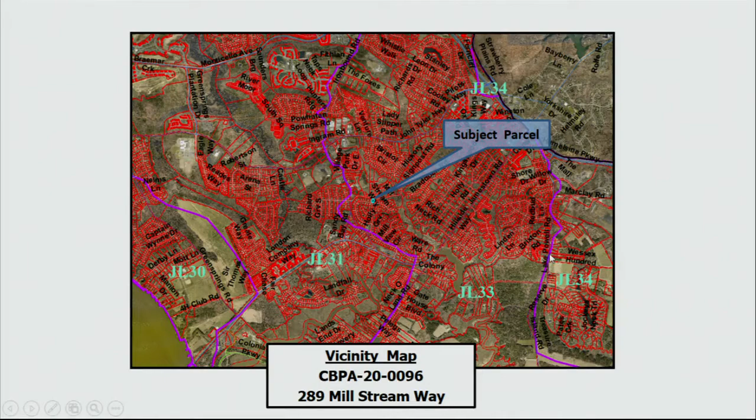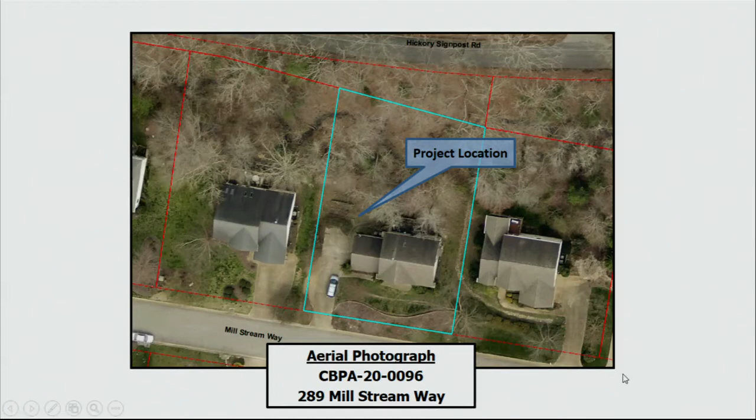Vicinity map above showing the parcel here in blue, again, within the Mill Creek watershed. Aerial photograph of the parcel in question and the approximate location of the project. The topography showing a slope down towards the resource in the rear of the property.

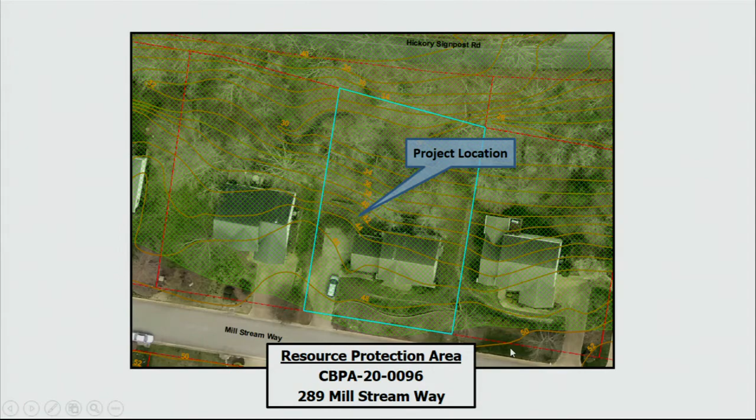This is the most current version of the site plan that has been submitted. The proposed retaining wall, a serpentine wall, has been pulled forward, along with the other two walls surrounding this paver area, with infiltration in front of the new serpentine wall. The proposed landings and paver area are shown here.

The 100-foot resource protection area as it affects this property. The edge of the wetlands is shown here in green, and the approximate center of the stream here in blue. The yellow area would be impervious area, and the orange overlaid on top shows areas proposed to be constructed with pervious pavers. There's also a conservation easement in the rear of this property.

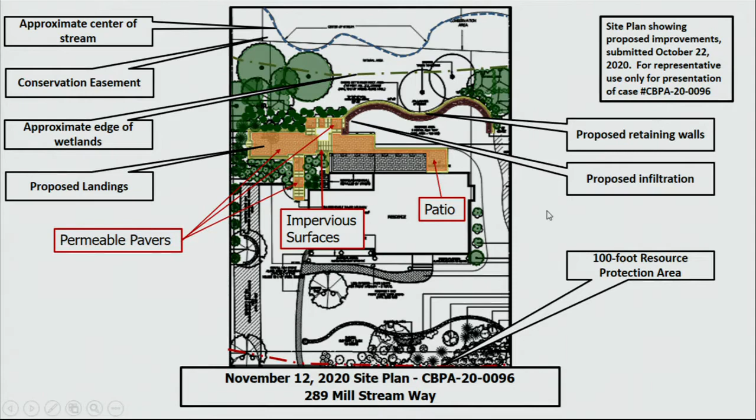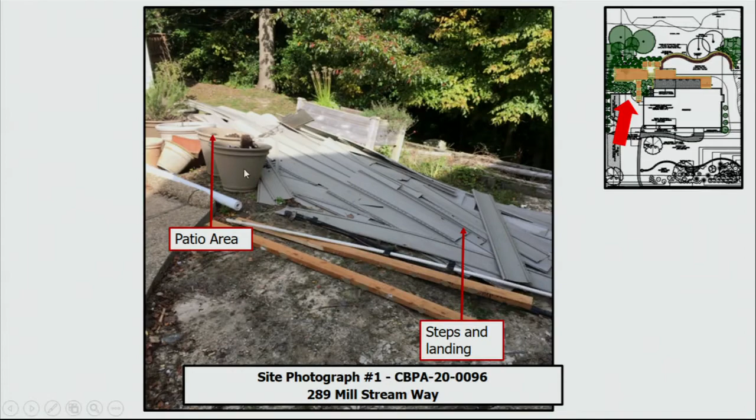Some site photos: the paver area would go adjacent and behind this driveway area, with the steps and landings to the right. This is the area of the approximate serpentine wall, patio, and landing area. This is the existing deck conversion. And again, the retaining wall would sit somewhere within this area, where the slope begins to slough off.

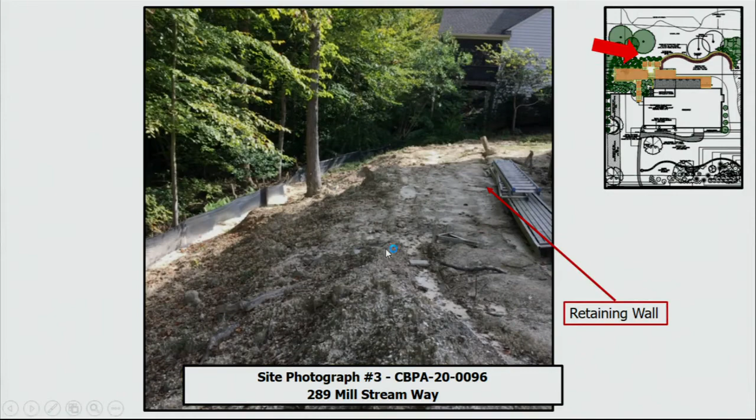Should the board wish to approve this project, all other necessary local, state, and federal permits shall be required. Enrollment in turf love shall also be required, and a mitigation plan of 3 canopy trees, 6 understory trees, and 11 shrubs shall be planted as submitted. A surety of $1,500 shall be paid prior to the commencement of work.

The serpentine retaining wall shall be no closer than 10 feet to the existing trees, with all fill recently placed between the wall and the stream to be removed and stabilized. This area should be re-stabilized with additional shrubs as ground cover.

The permeable paver walkways and landings shall be built to the DEQ standard of specification number 7, and shall encompass at least 400 square feet of the impervious surface. This exception request becomes null and void if construction is not begun by November 12th, 2021, with written requests for an extension submitted no later than October 1, 2021.

Thank you for your time, and I'd be happy to answer any questions the board may have. I'm going to start off with the first question.

You didn't have a slide showing where the proposed wall was that was presented to us last month, and where the new one is for this month. Can you pull up a slide so we can see that, and how much the wall was pulled back from what we looked at in our last meeting?

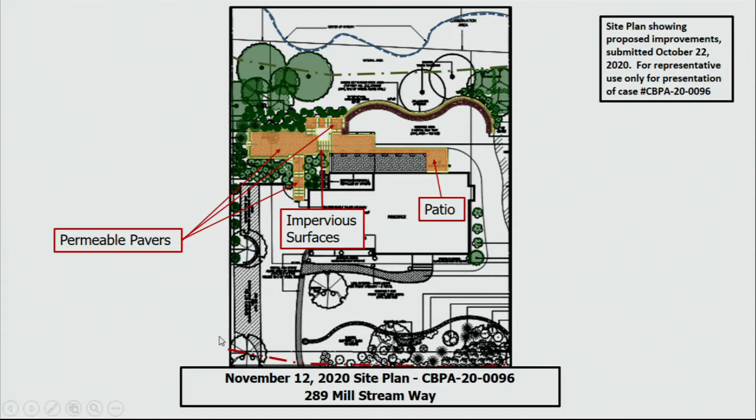Yes, so here would be the first submission of the site plan, with the serpentine wall shown here in yellow. It got pulled forward some here—by how much, I'm not entirely aware—but these would be the two site plans that were submitted.

Maybe when we get to the public hearing, I'd like to get that answered. Are we talking about 2 feet, 10 feet, or what?

Mr. Chair, that was one of the reasons we stipulated in the approval, should the board choose to approve, that the wall be no closer than 10 feet. We figured it's approximately 8 feet from the trees in the current configuration, so it must have been about 5 feet in the October meeting.

Wait, I didn't quite follow you there. So how many feet was it pulled back from what we looked at last month? Last month it was approximately 5 feet from the tree trunk. So it was 5 feet from the tree trunk, and we're pulling it back to 10 feet? So the wall's been pulled back 5 feet then? Yes, on average, approximately 5 feet back, around these two existing trees.

Mr. Gussman, I think it may vary slightly depending on what section of the wall you're referring to, so the condition in the recommendation for approval is that it be no closer than 10 feet, even though it may be a little bit closer than that in this design. It doesn't look like it was pulled back at all on the left-hand side of the retaining wall, but as you get to those trees on the right, that's where it got pulled back 5 feet.

So it's not 5 feet across the board. Okay. Are there questions from the other members of the board have questions for the staff?

I do, Mr. Chairman. Trevor, could you describe how the drainage flows through this property? Because I know there were some concerns over overland sheet flow and erosion, and that's one of the reasons the walls are there, to help stem that erosion.

Certainly. All water on this property basically flows backwards. It's fairly flat towards the house, and as soon as you get to the rear of the property, it starts to slope pretty significantly. Right now there's construction going on, so there's been disturbance due to the deck conversion. But as you can see in these photos...

Basically anything running this way comes over the driveway or around the house. For that reason, there's some erosion issues going on directly adjacent to the driveway, and coming directly from the other side of the house, which is why the serpentine wall, as is my understanding, has been proposed to take care of some of that erosion.

Thank you. They brought in dirt, though. That is correct. I believe that the majority of the dirt directly behind this addition was fill brought in, but the applicant can correct me if I'm wrong.

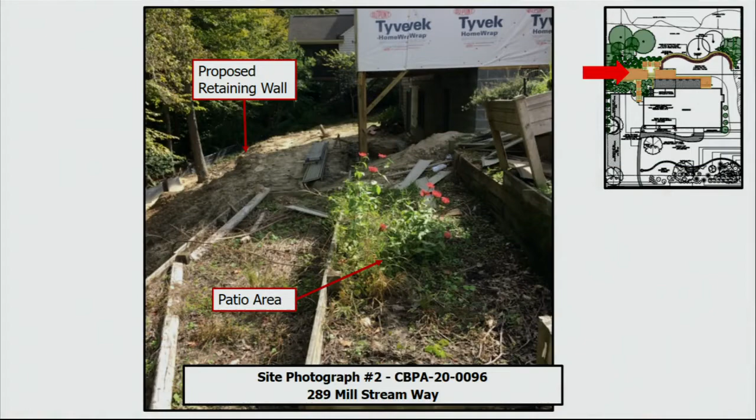How much dirt, since you're doing the work, I want to ask you this. How much fill are you going to have to move to get back to the 10-foot distance from the trees? Well, actually, dirt will actually be pulled out of there. It looks to me like there's a considerable amount of soil that's going to have to be taken back out to get the 10-foot distance back from the trees.

Where that soil has been leveled off from the excavation underneath the deck, that top portion will be rounded off just a little bit, and then from the 10 feet from the tree, we would go down approximately 2 blocks, plus about an 8-inch footer, so you're talking about 18 inches of excavation for the wall footer, if that's what you're asking.

What I'm asking is, it looks to me like there's enough soil around the base of this tree now for it to be lethal to this plant. Based on what little I can see here from the slide, it actually looks like you pulled some soil away from the base of the tree.

Well, it certainly looks like it. I have not physically been to the site at this point and seen this, I'm seeing the same thing you are from the slide. So it's a little hard to tell, but one of the intents was to maintain that natural slope and keep any excess soil moved from the excavation off of the tree roots.

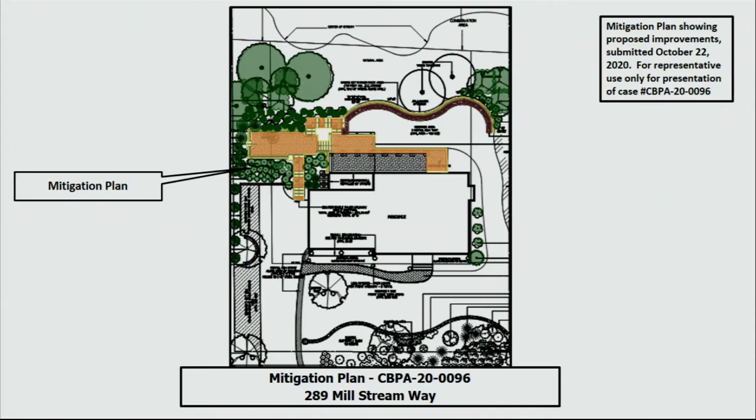That was my understanding. I think, and I would allow Greg to speak up if I misspeak, but I think he was talking about a dry river bed here, and not the outlet protection from the stormwater system that you and I saw in the wetland system. The reason that's important to me is because we end up treating more of the property with the wall, with the infiltration system they're proposing. Even though I know it's structural for both aesthetic reasons, it also performs an infiltration function. I appreciate the applicant pulling the wall back — I didn't realize in comparing the applications that they had adjusted. So I do appreciate that effort to try and minimize the encroachment.

So I'm a little slow here, but just to be clear, if the water is coming from that impervious surface on the right, which I assume is the driveway?

What is that, is the driveway to the left? Yeah, that's grass there. Okay, so the driveway is over here, O'Brien. But on the right-hand side, the front yard does slope to the right and down.

So the water flow in that area either moves towards the retaining wall or goes around it on the right? Correct. Mr. Wilson, will you put up the photograph, I want to look again. I want to see where the stream is in relationship to all this.

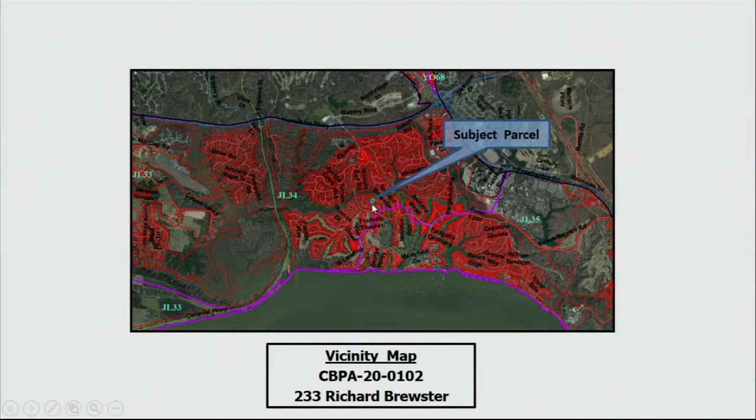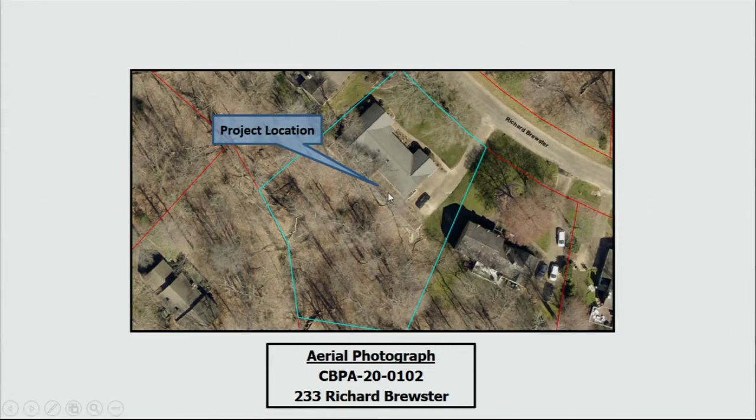Aerial photography showing the parcel in question and the approximate location of the addition. Topography as it affects this property slopes downwards towards the rear of the property with the stream channel below the property line.

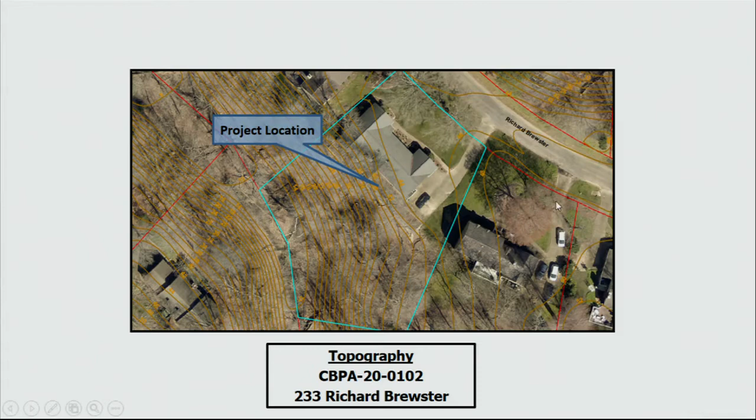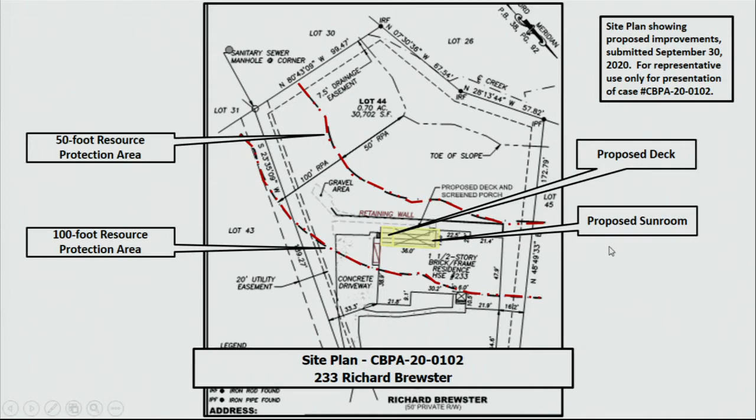Resource protection area for this property encompasses about half of the existing house. A site plan as it has been submitted. The proposed deck on the left side of this yellow area, the 100-foot resource protection area, the 50-foot, and the sunroom directly adjacent to the proposed deck.

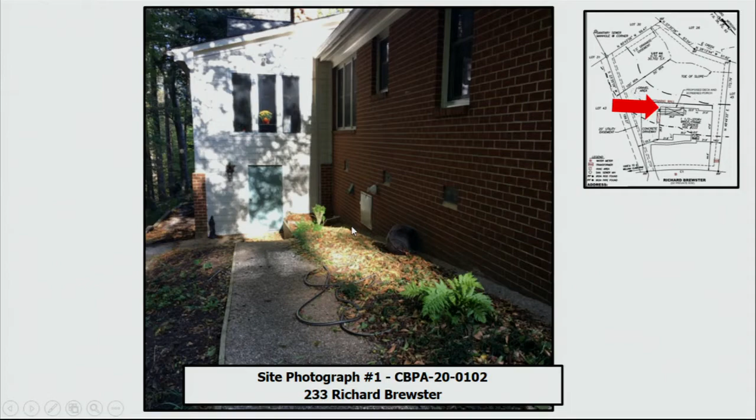Some photos from the site. Again, there is some existing impervious here, and there's also a concrete V-ditch here, capturing water from the roof.

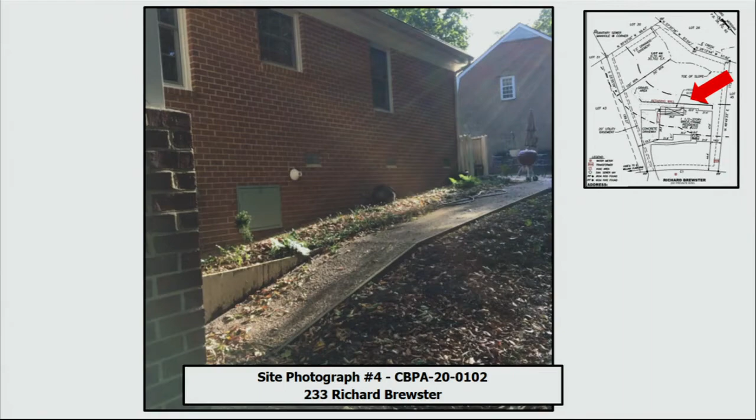Staff does recommend approval of this exception request, given that all other necessary local, state, and federal permits are acquired as they are needed. Then a mitigation plan of 1 canopy tree, 2 understory trees, and 3 shrubs be submitted with a surety of $500. Excuse me, that is a mistake on the screen.

However, it should be $500 be submitted to the James City County Attorney's Office in a form acceptable to it. This exception request become null and void if construction is not begun by November 12th, 2021, with written request for an extension submitted no later than October 1st, 2021, which is 6 weeks prior to the expiration date. Thank you, and I'd be happy to answer any questions at this time.

Any questions for staff? Okay, thank you. At this time I'd like to open the public hearing. Would the applicant like to come forward and address the board?

Good evening, members of the board. Chase Grogg with Land Tech Resources, 7657 Turlington Road, Toano, Virginia. Trevor pretty much covered everything. There's just a couple things I wanted to point out.

The Magoons are requesting this application because at the moment they don't have any existing outside seating area. If you go back one picture, Mike, you'll see that their grill is actually located on their driveway. So they're requesting this so they can have a screen porch with a deck, so they can enjoy some outside seating that doesn't require a table on their driveway.

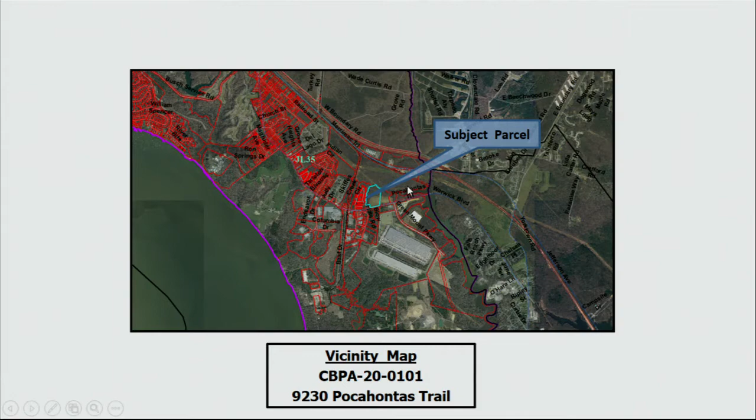I just wanted to give you a little context. This parcel here is the Morningside Baptist Church. The gravity line that they're tying into runs along the western property line. That western property line is also a perennial stream and is where the RPA is derived from.

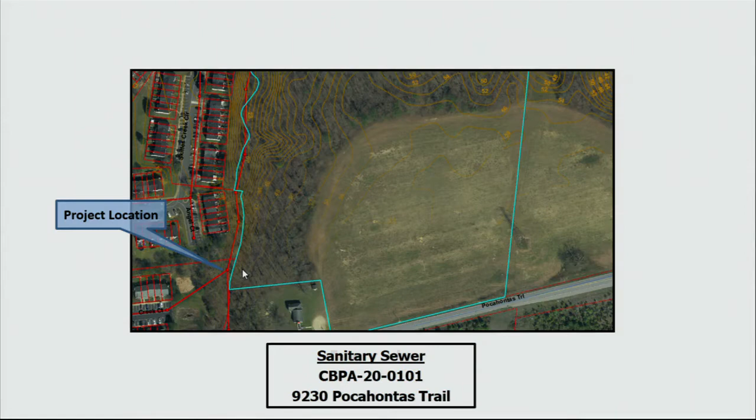The topography of the site is relatively flat in the upland farmed area, and then gently slopes towards the ravine, and once you get into the bottom of the ravine, the slopes increase significantly. The RPA, as it affects this site, is again centered on the perennial stream and the wetlands surrounding that.

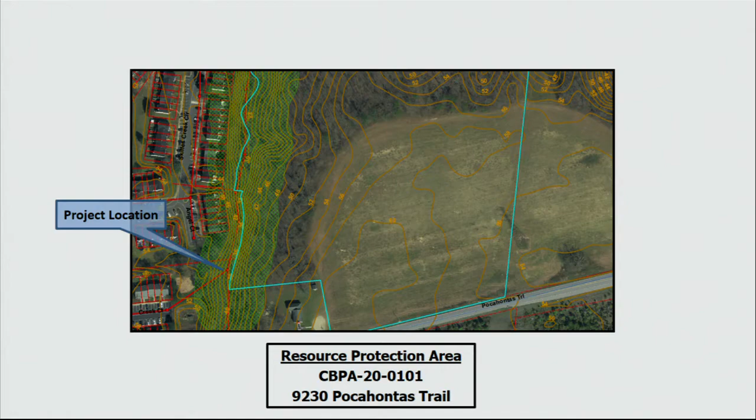From the site plan, this impact here is for the sanitary sewer. It will be going, and Mr. Lubier may correct me if I have this wrong, but it will be extended, and there's a further commercial property here that they will be tying that sanitary sewer into. This is one of the 2 BMP outfalls that I spoke of previously, and that would be an administrative approval when the time comes for that.

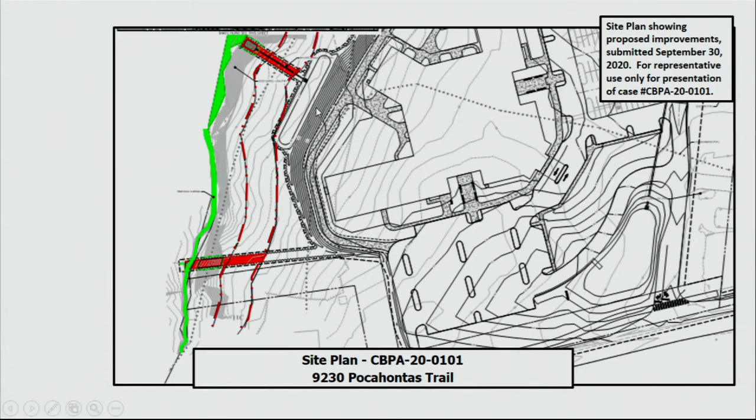From the site plan, their future expansion plans: Phase 1 is this worship hall and parking here. There's a BMP here, there's one here, and I believe there's one back here. Future expansion would be in this area and this area with further parking expansion here. And then here is the commercial area I was talking about that the sanitary sewer is ultimately tying into. Here is the road construction tying into the traffic light at Greenmount.

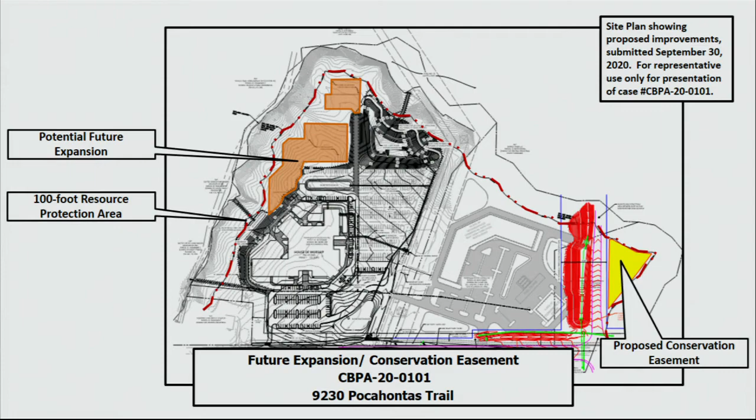This yellow area here is the proposed conservation easement that we have asked for, that is above and beyond the mandatory stormwater compliance that they must achieve on this site to develop as you see here.

Staff does recommend approval with the following conditions: that they obtain any other necessary local, federal, state permits, that a conservation easement equaling 5,700 square feet be dedicated on this property. The exception request shall become null and void if construction is not begun by November 12, 2021, and a written request for extension must be submitted to our office no later than October 1, 2021. I'd be happy to answer any questions the board may have regarding this application.

Any questions for staff? Yep, no questions, thank you.

At this time, I'd like to open the public hearing. Would anyone like to speak on this issue? Would the applicant like to speak?

Anthony Lubier with VHB. Two things I just wanted to note. The highlighted area for the proposed conservation easement wouldn't necessarily need to be the whole area—5,700 square feet is only about a third of that area. That's just the general area where we want to place it. And the sanitary sewer crossing will be a jack and bore in order to avoid digging up the stream channel, and likely to set up the bore pit will be on flatter ground, so we'll probably end up with less seaward RPA disturbance than what's proposed.